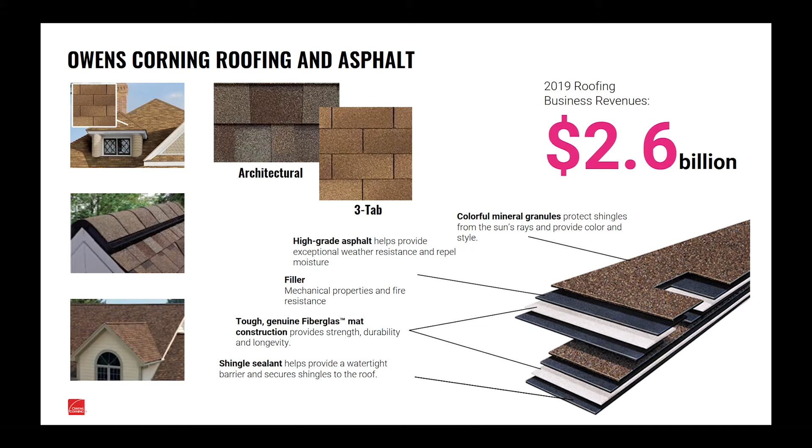Getting into the digital twin, we first investigated potential process twins when we saw a need for our plants and engineering teams to get fast access to large amounts of process and quality data for analysis. We selected a web-based process analytics and management app, which utilizes a structured database.

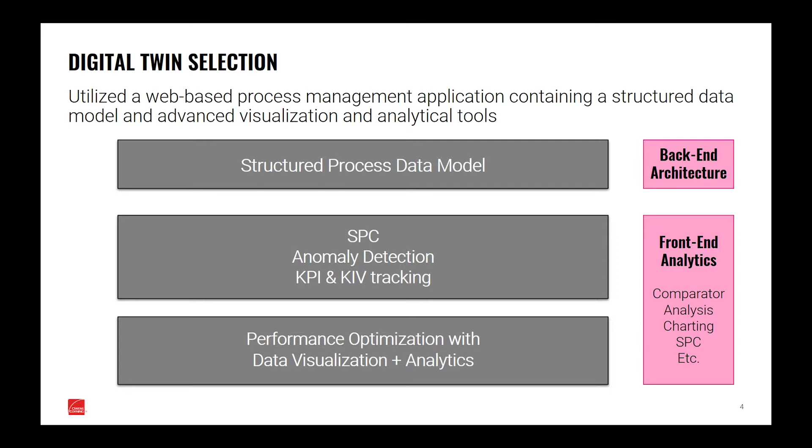The software we selected served 2 main functions for our operations: a back-end database with structured process data, and then a front-end analytics package that gave us an ability to identify optimal performance from our historical data and then tracking capabilities to maintain that performance. So the first portion of the digital twin software that I want to touch on is the back-end data structuring process that we went through.

So we feed relevant process data from multiple sources, for instance, data from our process historian, and we even feed quality data and COA data in some of our plants. And then what that process model does is it takes that data that we feed it, it lags it all to a common time step using calculated vessel residence times, and then that changes given our process inputs.

So we'll feed it level changes, flows, vessel dimensions, and then the process model is constantly updating the lag between process equipment. So if we have a slow time or a downtime, the model will adjust to fit the changing process context. So this will allow us to correlate between process changes regardless of where our sensor measurements are being taken.

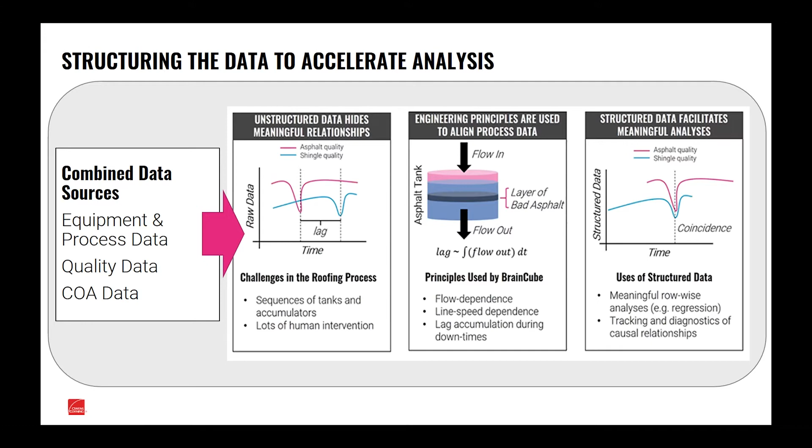So once the process data is structured in your database, you can actually begin establishing relationships between process variables and test the effects of input variables on output variables. So within our selected software, we were actually able to correlate a KPI's good performance that's user-defined by the engineers in the plant, and then correlate that with multiple input variables at one time using a cross-rank system.

So to obtain a cross rank, the data is placed into discrete operational windows. Then within each window, the software identifies exactly how many points are in that window, and then what percentage of those points led to good or bad performance of our output variable. Input variables that have more points in areas of extremely high or low performance earn a higher cross rank and are more correlated.

This method was preferred because it actually allowed us to address some of the challenges you face with trying to find correlations in process data: non-normality, discrete values, and outliers. The analysis tool is actually able to handle all of those odd things that you'll find in process data.

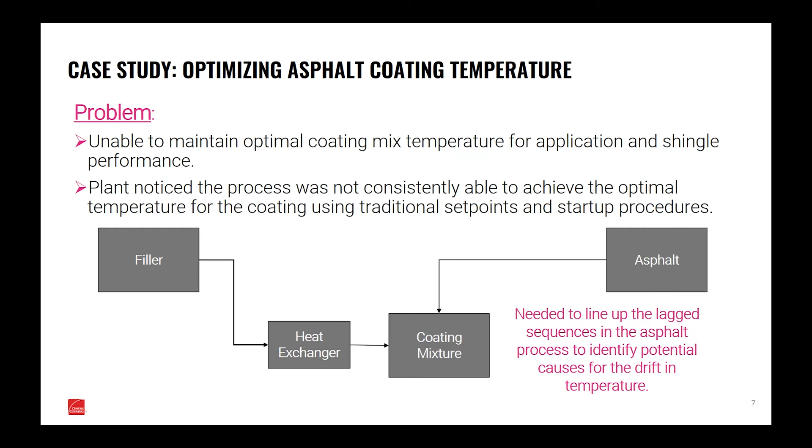What we needed to understand was what had drifted in the coating process while considering any process lags in that correlation. So upon running an analysis, we had noticed that the filler temperature was significantly limiting the filled coating temperature. Then the tech leader actually went back and looked into what led to that lower filler temperature and identified periods of runtime where we were getting little to no heat exchanger fluid flow to their filler heater.

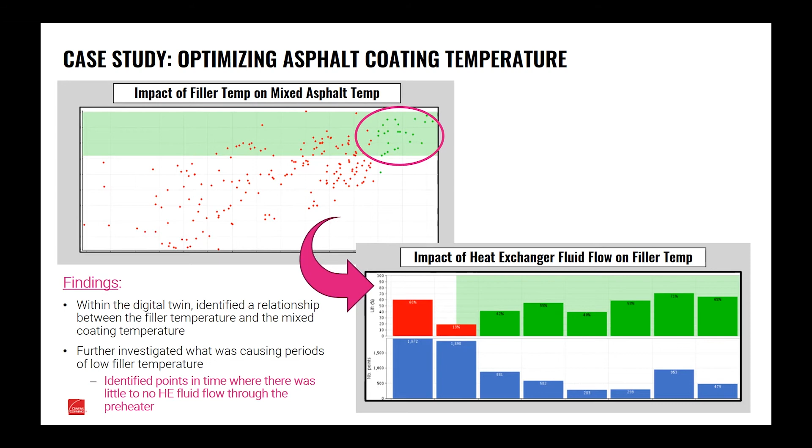Now, this was an issue that the tech leader had mentioned would normally have taken weeks to identify and traditionally would not have been noticed by the plant personnel until it was causing significant run issues for their plant. So to resolve this issue, we repaired the mechanical failure that resulted in the upset condition. And then in addition to the repair, we wanted to track these variables to prevent similar issues in the future and further optimize the process if possible.

So what we ended up doing was we took those identified ideal ranges for the filler system variables using the analysis module. And now we are monitoring how well we are maintaining these set points, and we're actually able to see the real-time impact on our key output variable of coating mix temperature. So this is different than traditional SPC because we're not just trying to keep track of individual variables' performance within a particular range. We're actually looking to control particular inputs and see how they affect an output, which is the main benefit of using a digital twin to model your process.

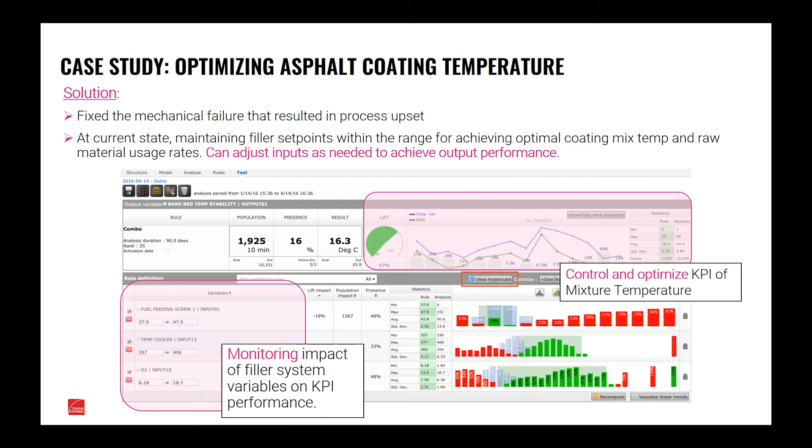So outcomes. So what were the main benefits of utilizing a digital twin within the manufacturing space? So with this particular case study, we were actually trying to achieve productivity. We were actually able to achieve a significant materials cost savings. Some additional benefits that we got out of the tool were we found engineers were spending less time actually structuring data for lag times on their own. If they're interested in looking at an event and it took place around a slow time, the engineers would have to manually take that into account. But with the process twin, this is already accounted for us.

It also increased visibility to what was shifting over time in our processes, and it also helps us capture some of that knowledge from senior engineering leadership. So some of those core fundamental process relationships that we'd like to keep track of, we're actually able to record that and track that in the tool.

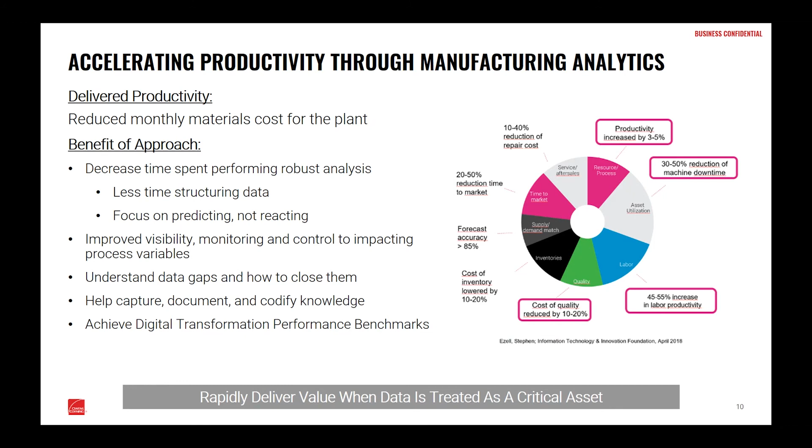We also learned a lot of lessons throughout this whole process. So although digital twins are a technology that can be useful in understanding your process, without data gaps being closed and proper maintenance procedures in place, process modeling is limited or not possible at all. You won't be able to calculate residence times if a data feed is unreliable or non-existent. In addition, any relationships that your engineers know exist on a fundamental level will be obfuscated if your data feed isn't kept in optimal shape.

We also saw how important it is for facilities to actually have resources to shift from that reaction mindset to a predictive one. It's really hard to think about and optimize for the future if you're constantly thinking about the next fire to put out. So helping plants with this digital transition is going to be critical for any technology that you implement in the future.